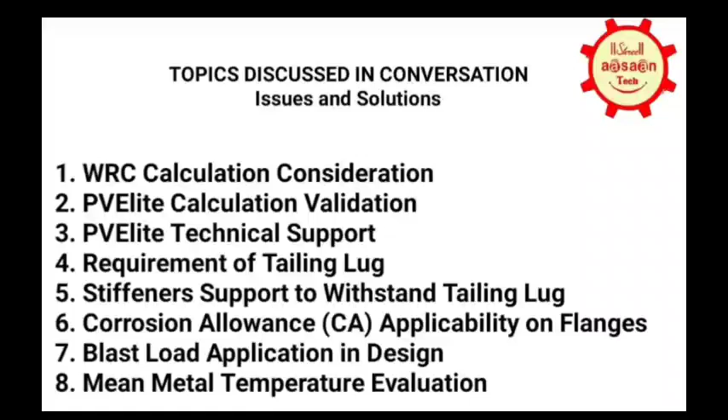Did you find this, in WRC 297 only sustained loads are applicable? Why is it so in PVElite? Did you find anything? WRC 297, sustained load is applicable. Why? Because it is a cylindrical connection. Is it mentioned anywhere in the code that only sustained is to be taken? In WRC 297 it is mentioned.

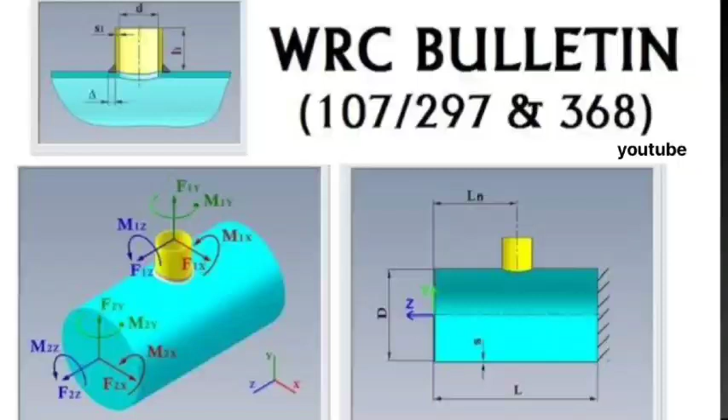Where there is a cylinder and there is an opening on the cylinder, then your sustained load will be taken. Okay, so it's already mentioned in the code, right? Yeah, in 297 it is. I think not 297, or 537. Somewhere it is mentioned. Okay. This question was raised by our ASME auditing. So actually, Siddharth also raised a query to PVElite, but they didn't come up with a good answer for that one.

No, actually, this kind of questions, PVElite is not going in depth of WRC. They are just deriving with respect to the formulas given in the code. And those step by step also PVElite will not give. PVElite simply gives the end results, how many iterations it is taking and what is the final value, whether it is passing or failing. That's why it's difficult to understand why they are taking this.

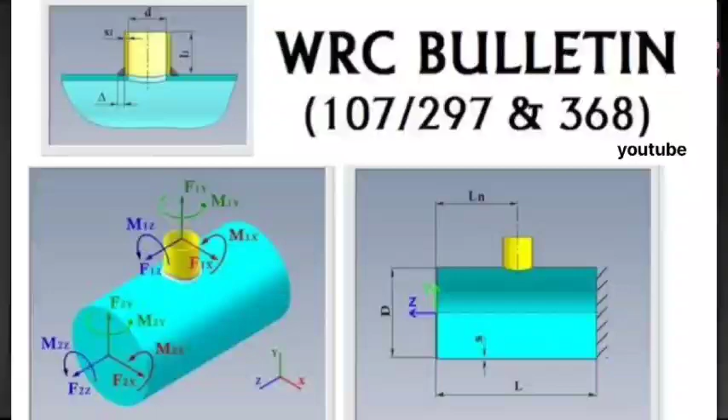So the only thing is we need to do a manual calculation. Manual calculation is a bit easy, I think. So have you prepared any Excel or anything for this one? No, but I can check with my friends, because a few of my friends did some R&D in 107 and 297. So let me check. Okay, actually Siddharth also started putting values in Excel and they are splitting the loads in that one, in thermal. Yeah, a few of my friends did, I will try to catch up with them and get as much as I can.

Okay, Siddharth, if they get it, they will share with you. Sure, definitely. They are doing manual equivalent validation, no? Manual validation we are doing. For most of the cases and major scenarios we are performing manual calculations, like nozzle reinforcement, nozzle limitation, shell thickness, dish thickness. I think mostly all the parts we perform in PVElite we are doing manual calculation. Manual means in Excel, right? Yeah, in Excel.

Even conical transition also we are validating. So you are getting almost the same result as it gives? Not almost, but there will be some 1 or 2% difference. That we observe is mainly due to the decimals. If at any specific point you face some huge difference, let me know. I will also cross check.

Because with the Dubai PVElite team I'm in touch, Shiva Ganesh is there, Natarajan is there, Vinod Pandian is there. So some of the technical team I'm in touch with. If you face any difficulty, let me know, I'll talk to them. Siddharth, you were specifying some particular name, no? Yeah, that was an old gentleman, Ray Delaforce, from Intergraph. He used to come to India to deliver lectures about PVElite, and he was the technical expert. Very difficult to reach him, he will not respond.

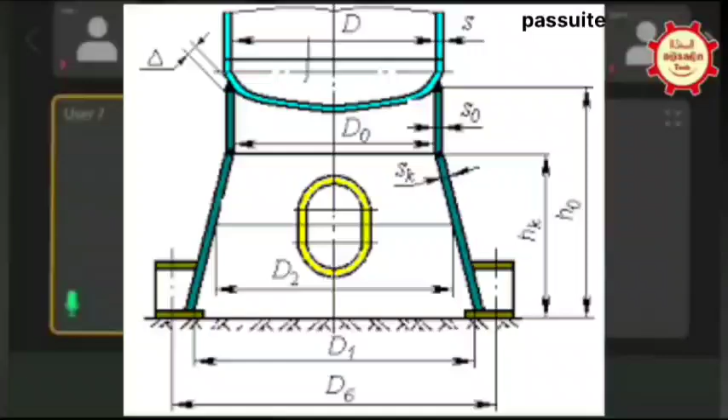See, why are we putting a tailing beam? To avoid deflection in the PCD during erection or lifting. After erection, they will cut the tailing beam and trash it, if it is not mandatory to keep. Correct. The main things to calculate the tailing beam are radius of gyration of the beam, moment of inertia of the beam, length of the beam, and quantity of the beam. These 4 factors are more than enough to calculate the cross beam stress.

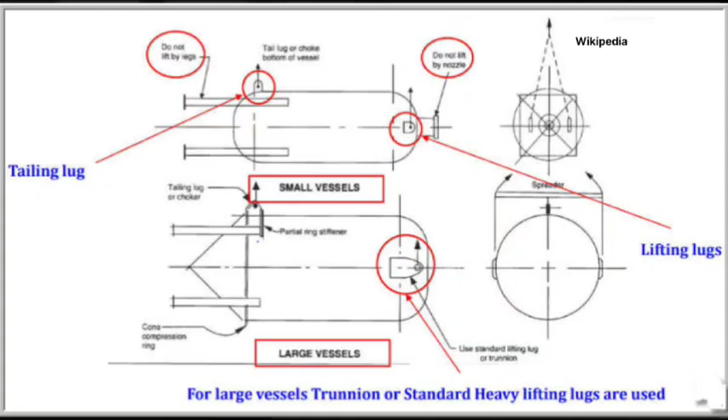Yeah. I will share the calculation, most probably by Monday because today is weekend, what we derived and are using in our regular job. Okay. So you are not referring to Dennis Moss? No. Dennis Moss we are using for one structure, so accordingly we are doing some offset and performing. So you mean with respect to the center point, we are offsetting? Like 2 points? Yeah, 2 points. But this validation, whether it will be approved, how do we convince where we referred?

We are submitting the calculation along with the tailing beam. But whether that is accepted, since you varied from Dennis Moss? You are not referring to Dennis Moss exactly. We have taken the concept of Dennis Moss and modified it with respect to our requirement. Okay, so that is acceptable, right? Yeah. We have used it and we succeeded also.

Okay, Ramakrishna, I think it's better. Recently we delivered, even for European standard, we used the same properties. Today, 4 equipment were delivered; they went out from dispatch from our shop. Okay, then you share on Monday, Ramakrishna. I think you can use that one. Monday I'll share. I have one more question.

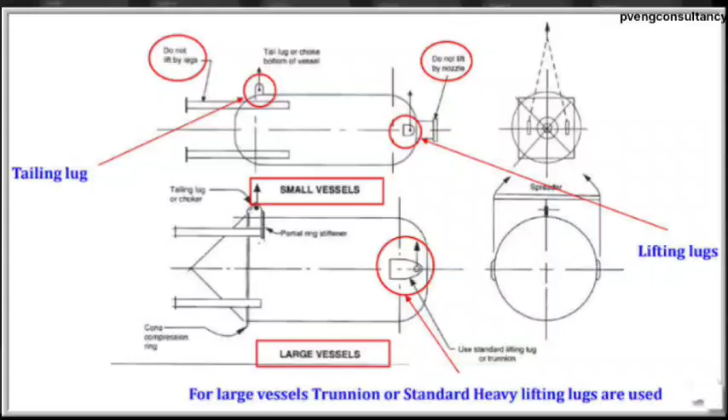There is no complication in the beam. It is a normal, very basic calculation. But the thing is you need to offset the distance. Even if you are not offsetting, one straight beam calculation is enough, and increase the quantity. Because your governing point is the major length. Major length will be your center point. But you are not putting it at the center point. Your beam length is reduced when your offsets are 500 or 600 mm.

Then there will not be any big difference. And obviously you are checking with your allowable and actual stresses. Yes. You are comparing and taking a rigidity value also. Yeah. So it will pass. It's passing, and we are successful. We are doing it in our actual jobs.

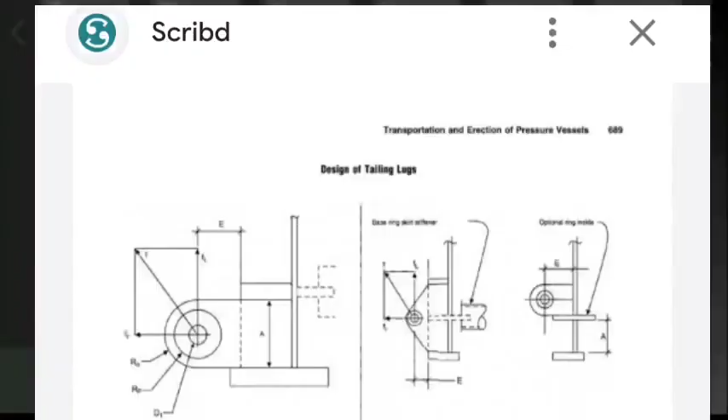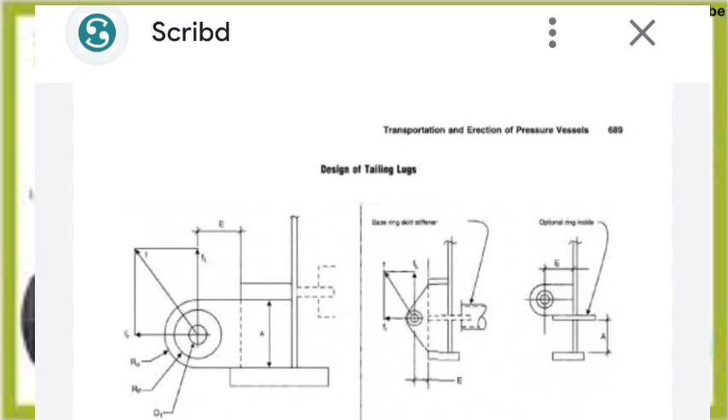So have you done this configuration with two tailing lugs also? Yes. It is applicable only for two tailing lugs. For one tailing lug, a normal straight pipe is enough. For two tailing lugs only, I'm talking about: two tailing lugs and one central beam, and perpendicular to that one more cross beam. See, for two tailing lugs, one central beam is not required. Where the tailing lug center point is, you need to fix the beam there.

Oh, okay. Then we need to provide. Okay, so two beams are required. Yes. And it is like an H type. Okay. See, from the top view, or from the bottom view if you see, it will be an H type. Okay.

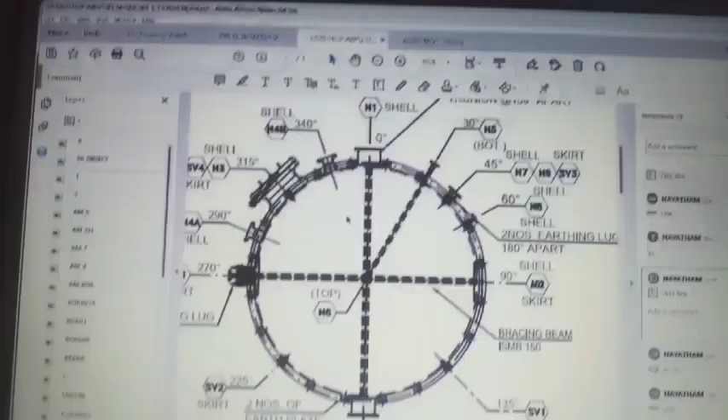One second. Let me share my screen. Actually, I will share what is the present condition. Actually it was done by somebody else, and I am doing the correction. Our trunnions are here, so lifting lugs are here. Tailing lugs are here. So he provided one beam here and perpendicular to that one more beam he has given.

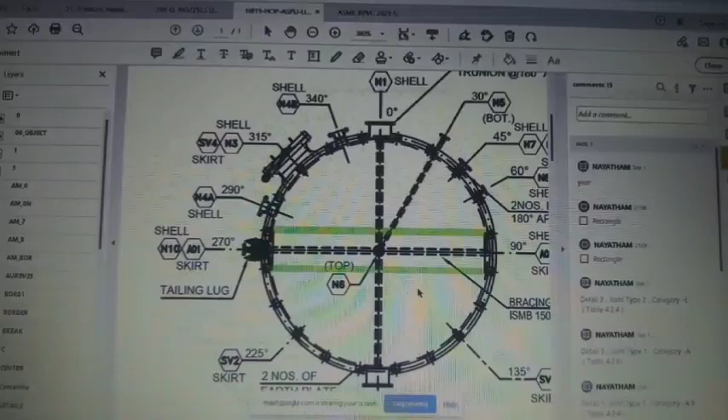So I think whether this is correct. I think this is not correct, no? No, this is not correct. See, at some point your PCD may, what to call it. So okay, it has to be like this. H type he is telling. H type you have to go. Right? Inside one more. Okay. H type. Just for further strengthening.

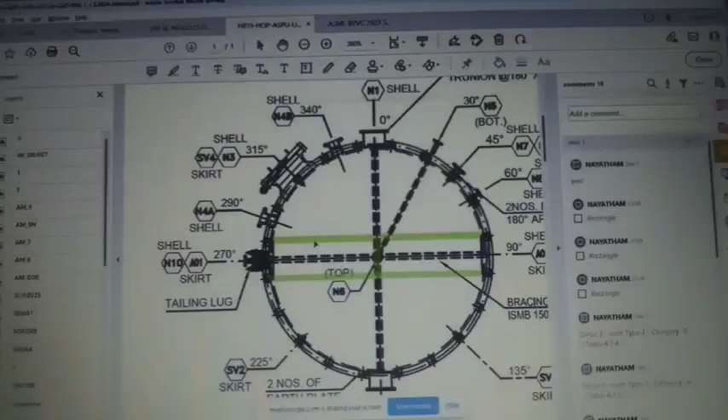Okay. Understood. I think this calculation is available in Dennis Moss. Brother, not in the center. Actually, the long green line you drew, no? Like the same in 0 to 180 you have to draw. Okay, I understood. Now for 90 to 270 you have drawn two lines. Like the same you need to draw for 0 to 180 also. You mean, like this also? I mean one more. Exactly. Yeah, fully.

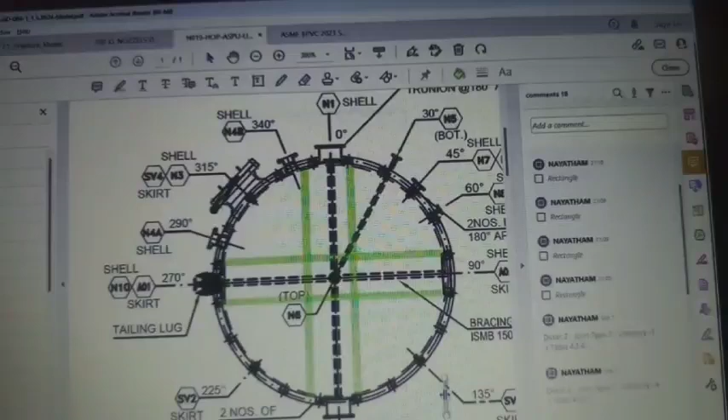Okay. So two beams will be full beams and two beams will be partial beams. You cut and weld. That's okay. So you mean like this? Exactly. And this is not required. Yeah, that is not required. So this is not an H type. I think it's a plus. Double cross. Yeah, we can say double plus. Okay, so this much arrangement is required.

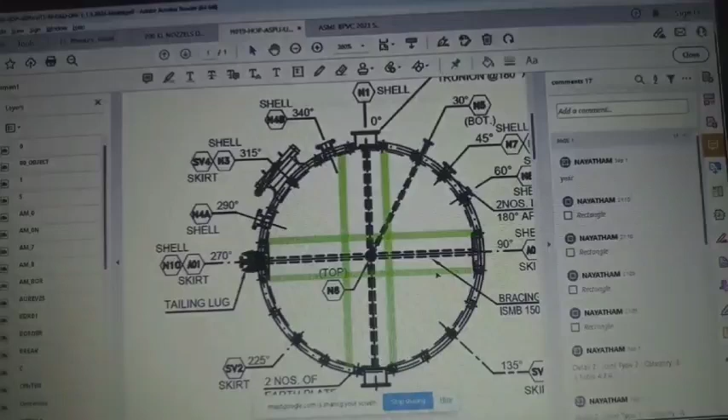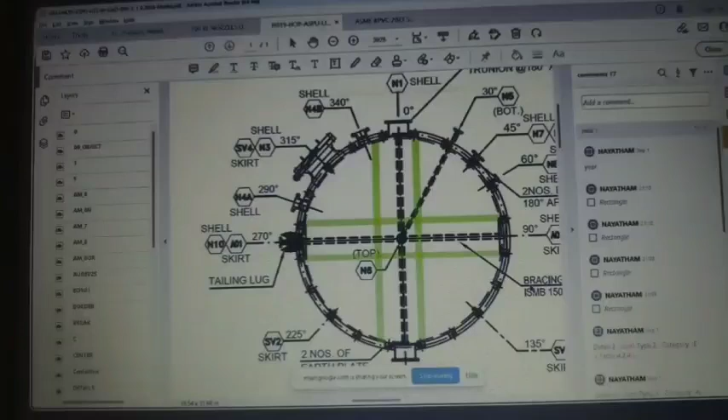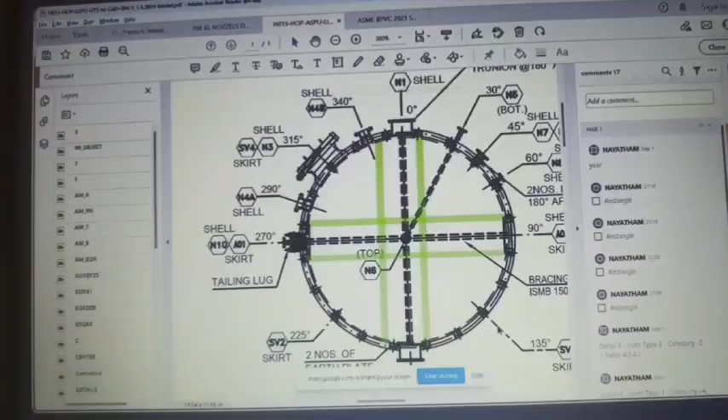Okay. His is I think only 60 tons. You can blindly close your eyes, decide the material and proceed. Yeah. Because actually my weight is hardly 70 ton. For 60 ton, one is enough. No, somehow locally it is failing. His diameter is 3.5 meters, dude. Diameter is too high, 14 mm thick. Carbon steel he mentioned, SA36.

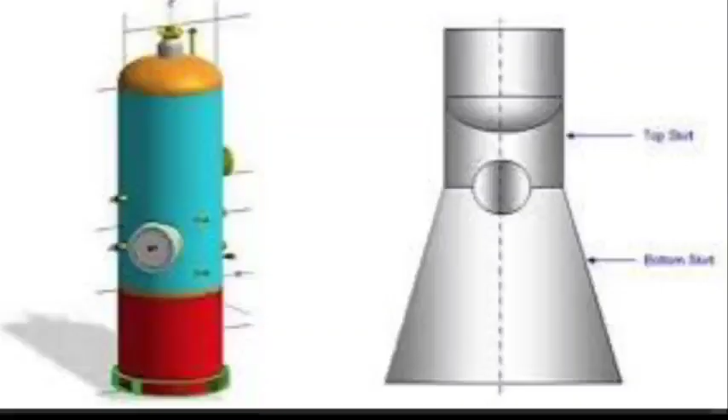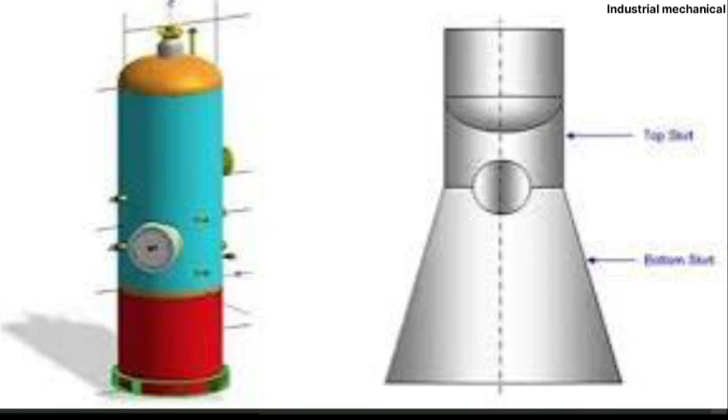Yeah, okay. You mean skirt is SA36? Yes. Actually, it is 36, IS 2062. If you say 36, your yield is 240 or 250, I think, right? 250, correct. Your cross-sectional properties of your skirt are coming less than 250. Yeah, I need to check actually. It is showing some failure. Maybe that Excel sheet I'm using.

See, previously, for less than 100 ton, let us say, a pad for the tailing lug is also not required, unless you are performing WRC for the tailing lug. If you are performing WRC for the tailing lug, definitely there will be a requirement of a pad or an insert plate at the tailing lug. Or else you need to increase the tailing lug thickness to maximum 50 or 60, instead of putting a pad.

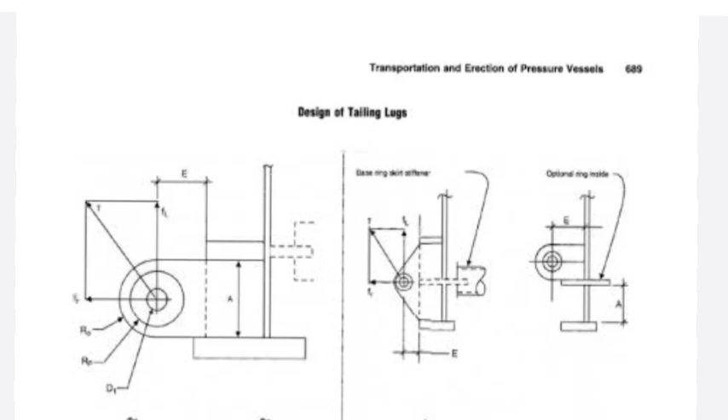What they have done is they want to use less thickness, 25 mm thick tailing lug only. So that's why they put it. No problem. If it is not fabricated, put a square insert plate. Correct. Square sectional insert plate. While performing calculation, consider it as a diameter. What is the OD? In our vessel, now we are doing 280 metric ton. The vessel is lifting in full dressed condition. It's almost a 40 meter column.

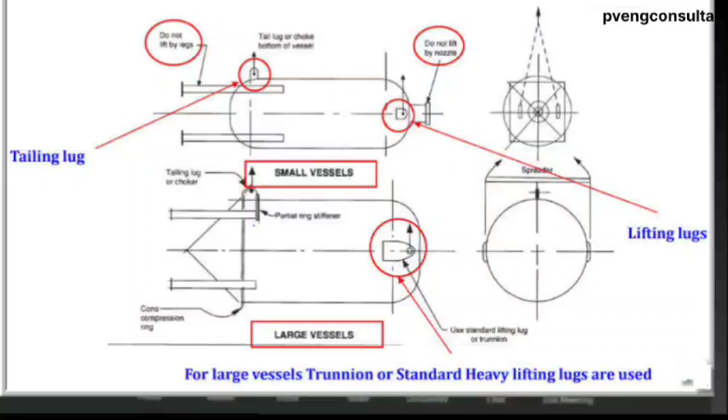But the thing is, your skirt base ring is governed by combined loading, because the blast load is more. Oh, okay. Yeah, and my base ring thickness is 90 mm. So for my tailing lug, we didn't provide any insert plate, because the skirt thickness in the bottom portion is almost 40 mm.

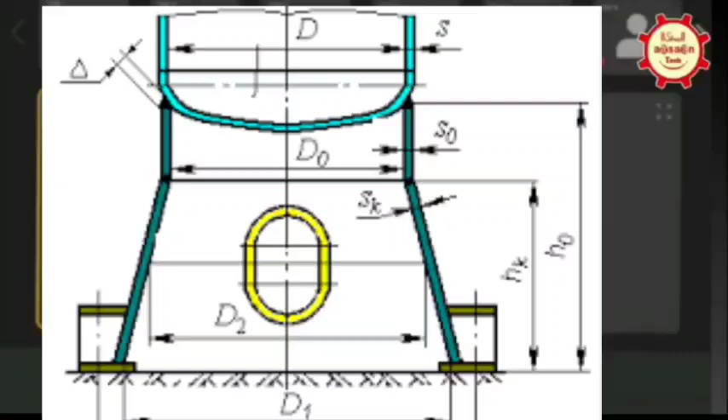Okay, I think you share that one, your Excel. Sure. That Excel will be very, very user friendly. It's like that Excel I prepared like a local author book, which we used to study in our engineering days, right, compared to standard author books. So that Excel file will be like referring to a local author book; you will understand very easily.

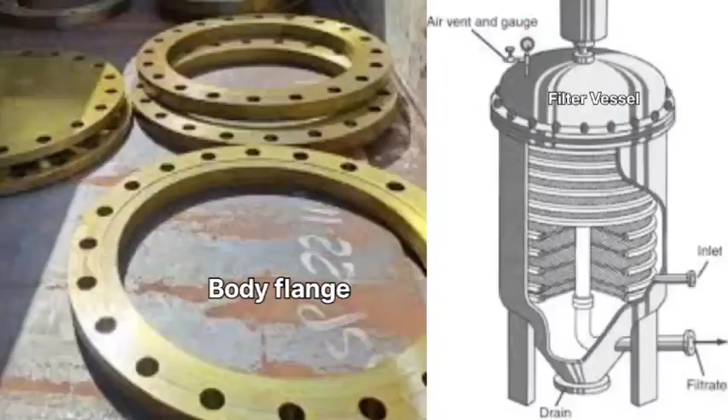Okay, Ramakrishna, you want to ask something else? Yeah, I have one more. I have a filter vessel and the body flanges are standard flanges, standard size. Something like 24 inch or 18 inch? Not even 24 inch. It is just 12 inch only. Okay, small ones.

The question is for the blind flange. The corrosion allowance is 3 mm. So in that case, our RF is generally only 2 mm. So we need to perform the calculation as per UG-34, correct? Exactly. Or else there will be a major NC in the audit. Six or seven years ago they were not finding this error, but in the last 6-7 years, in all the companies where the ASME audit is happening, everywhere they are finding this and they are getting that.

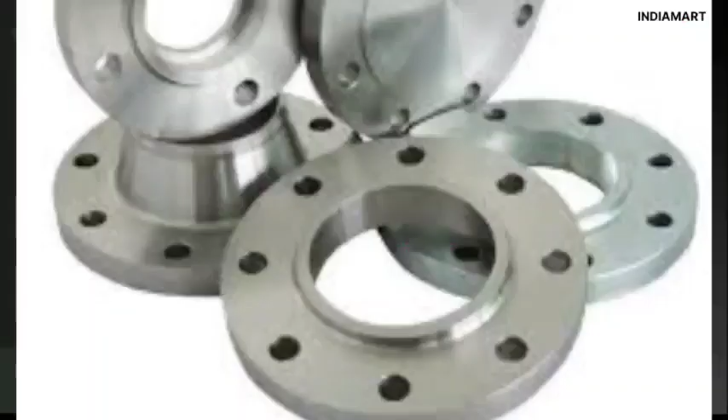Usually for the blind flanges, even if it is not a filter, if there is any process nozzle connection where there is loading, we will consider corrosion allowance 3 mm. Sometimes manway also we check, in very rare cases. But generally we are not checking manways. But in a rare case, around 1 or 2 years back, some client asked us to check the manways also.

Maybe some loads coming or maybe some equipment. I don't know. We tried to convince them in all aspects. We even shared the response from our authorized inspector, but they specifically wanted that, and we didn't have any other option but to perform it. Okay, Ramakrishna, I think we need to consider the corrosion allowance and we have to perform that. Yeah, mandatorily we have to consider it. Okay, Ramakrishna, you got your answer.

For the blast load in PV Elite, we have an option to give it as a wind pressure. And in some projects, the client specifically mentioned to apply it as an external pressure instead of a wind load. Both cases are acceptable. But the thing is, if you consider it as a wind pressure, your blast load will cover beyond the vessel area, up to the deflection limit. Whereas if you consider it as external pressure, it will limit up to the thickness. It will not go beyond the thickness.

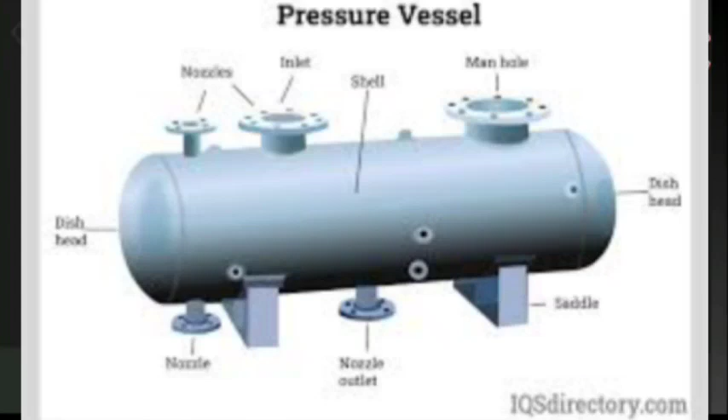Let us say the outside diameter of the vessel; it will not go beyond the outside diameter of the vessel. So in both cases you are telling it will be okay? It's not an issue, but preferable is the wind. Why do some clients specify to apply it like a wind, and why do some clients specify to apply it like an external pressure?

Where the client has given it as external pressure, your blast load will be higher than the expected one. The blast load given by the client will be a higher value than the operating value. You mean they will take more safety margin? Exactly, more safety margin. Something like 20-30% higher than the actual.

Okay. Thank you, sir. Hello. Yeah, Kumar. Yeah, hi. Good evening. I joined a bit late. Nobody's there or what? Yeah, they left recently, just now. You closed it? Yeah, almost. We're close. Okay. I joined a little late actually.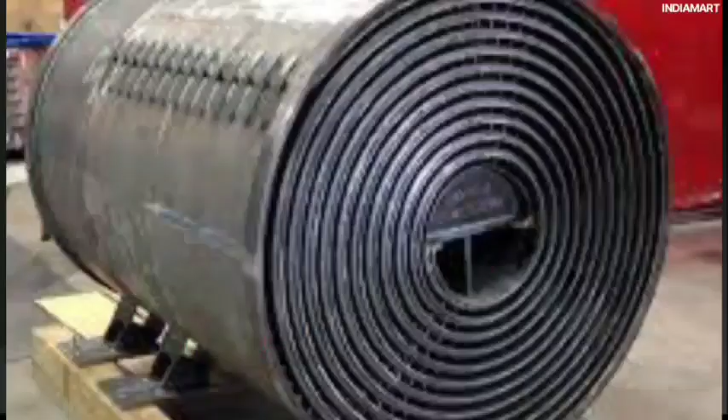I thought recently you just posted something about spiral heat exchangers. Yeah, a discussion is going on. We started manufacturing spiral heat exchangers 2.5 years ago, and we are doing good in that. So I thought the topic would be interesting, and I saw your message too late actually. Actually, the spiral questions started in our meeting, and they got some answers, but that's not satisfactory. I think next week when you come, maybe we'll discuss the spiral heat exchanger further.

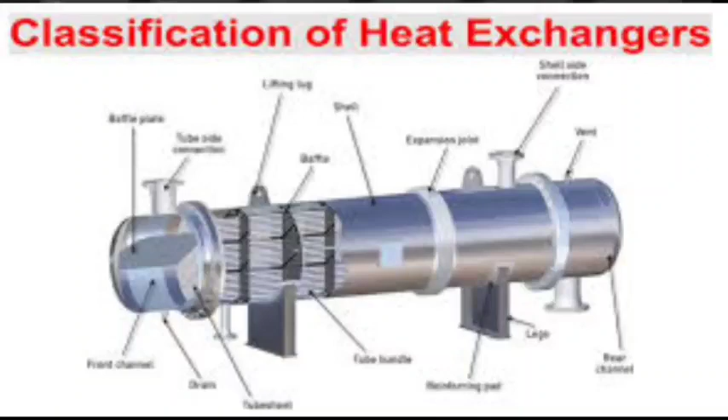Okay. So Mr. Kumar, you are from shell and tube heat exchangers, process design, thermal design you do? Yeah, I do thermal design. So how do you evaluate mean metal temperatures for conditions apart from normal operation? Upset conditions, like a shell side startup, tube side startup condition, or a sudden pressure drop?

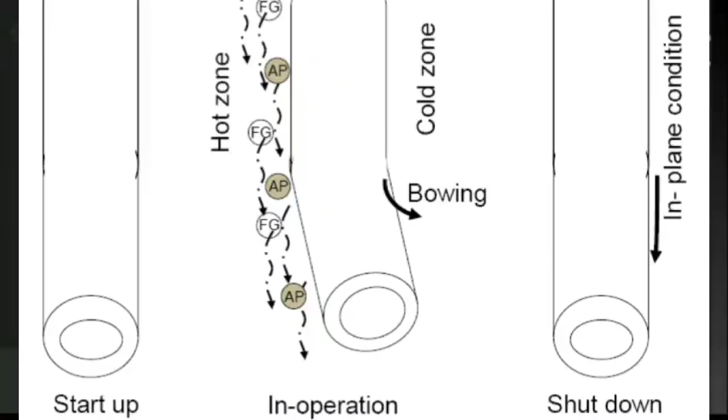So first we need to understand how you are going to operate this heat exchanger. Let's say you have a steam heater or any process equipment or shell and tube heat exchanger. You know what the startup and shutdown conditions will be. Normally we consider a no fluid in shell condition first and a no fluid in tube condition. Based on that, whatever fluid temperature is expected in the heat exchanger will be your tube temperature. Let's say steam is entering the shell and there is no fluid inside the tube.

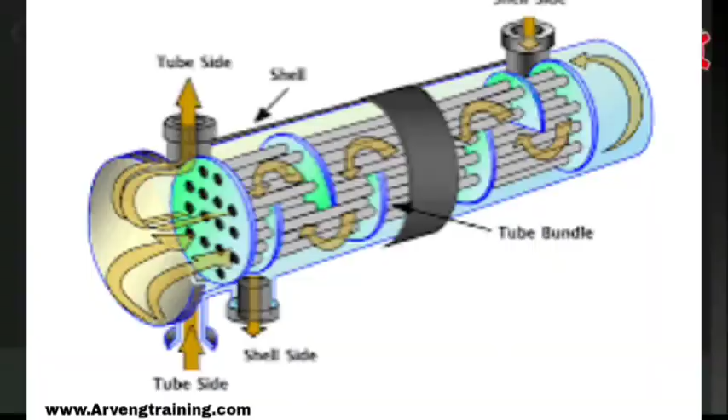So in that case, with steam in the shell, we know the temperature of steam. The steam temperature will be the mean metal temperature of your shell, and the tube temperature will be equal to your steam temperature. So the mean metal temperature of tube and shell will be the same, and that will be considered for mechanical design.

The second case, we will have no fluid in the shell, so the shell temperature will be the environment temperature. If you are operating in India, it will be taken as 30 degrees Celsius. And on the tube side, the highest temperature you get in the process will be considered as the mean metal temperature of the tube. So these two conditions are normally taken into consideration.

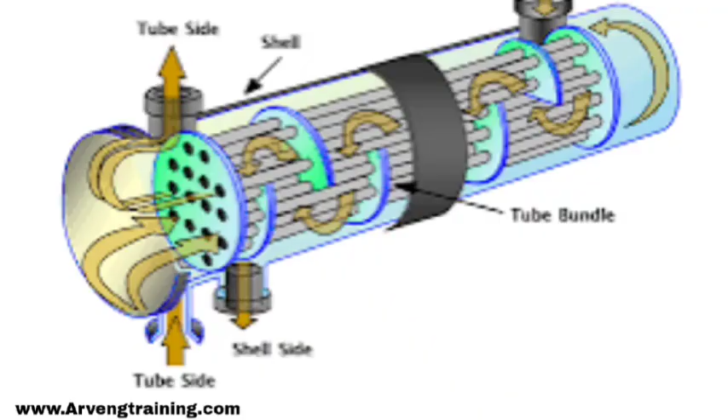In the case of steam, it is normally advisable to operate the equipment so that steam does not enter the heat exchanger unless your process fluid is flowing through the tubes. But if there is some condition other than startup and shutdown, and you expect a sudden surge in the temperature of one of the fluids, that has to be taken into consideration. If during the process you expect high temperature fluid may come into the heat exchanger, the exchanger has to be simulated for that change in duty, and then we calculate the mean metal temperature.

That simulation you can do in any heat transfer equipment design software like HTRI or HTFS. We'll continue in the next session. Yeah, it will be a little longer, we'll discuss in subsequent sessions. Okay, thank you. Sorry for the late joining.